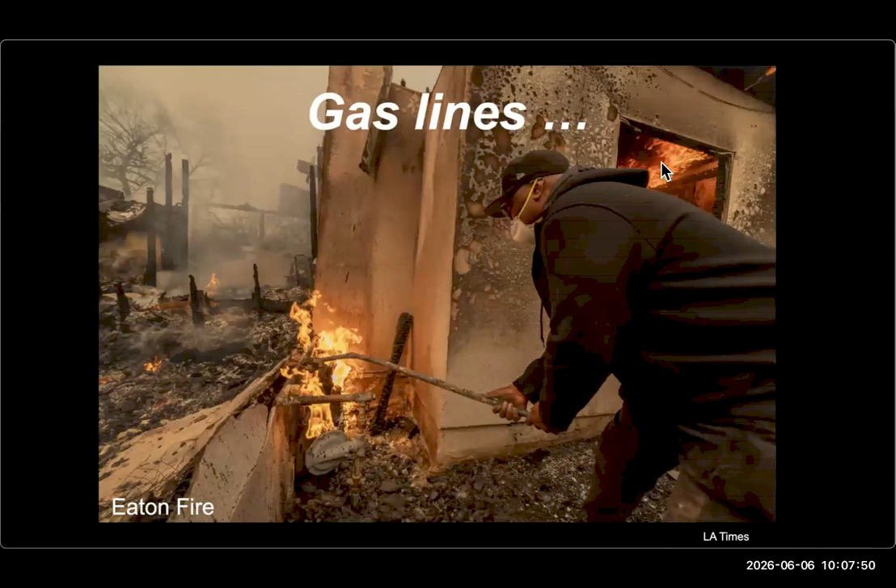Let's start with a definition. Resilience is the ability to recover from unexpected shocks. It doesn't take a rocket scientist to know that gas lines are not fire resilient. So how can we minimize future losses to our homes and loved ones as the climate crisis accelerates?

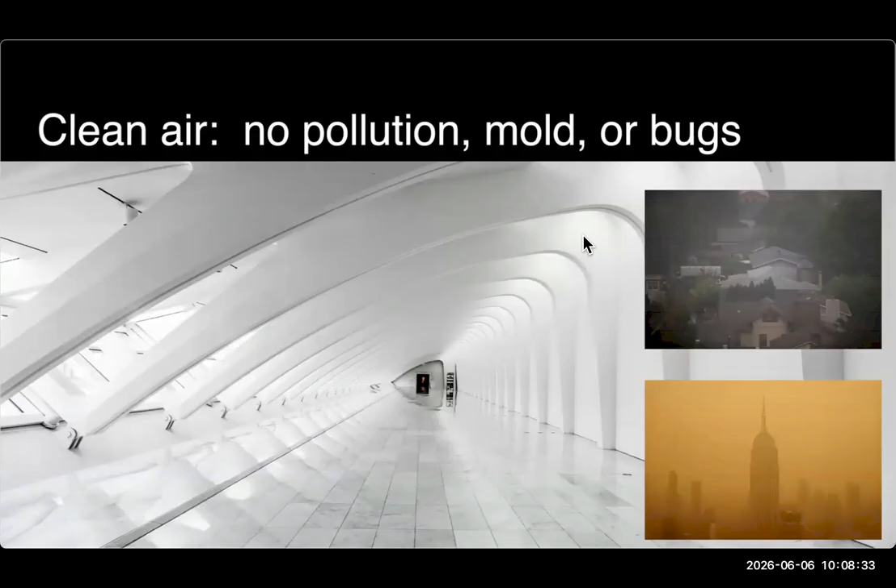Let's pause for a moment and imagine the homes we'd like to have. How could we describe them? They'd be cool in the heat, warm in the cold, no drafts, clean air, no pollution, no mold, no bugs, no dust in the house. They'd be quiet. They would use a paucity of energy, low energy bills. And with low energy bills comes a dwelling that's affordable to live in, and they would be fire resilient.

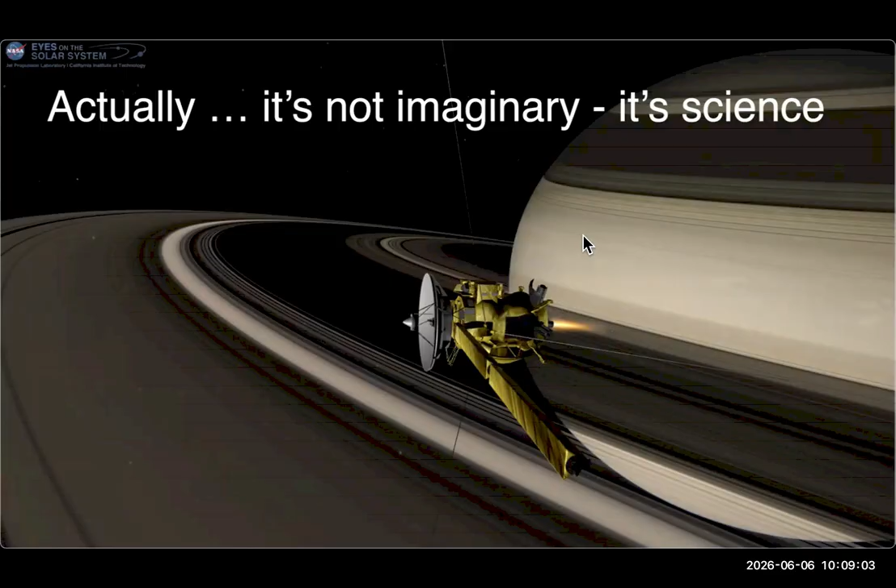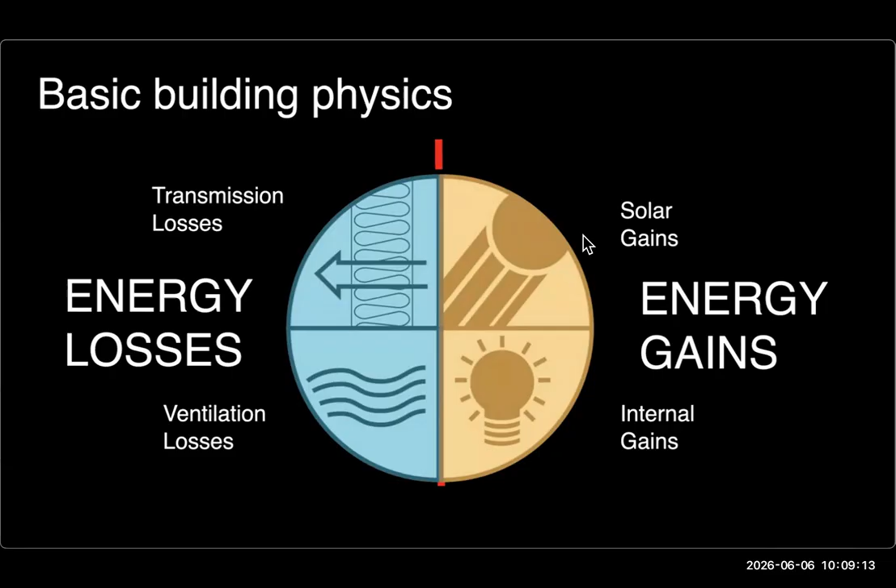That kind of home is not imaginary, it's science. And here's how we make it happen: we just apply basic building physics. We balance energy losses with energy gains. And it turns out that saving energy brings along many other benefits that we value even more.

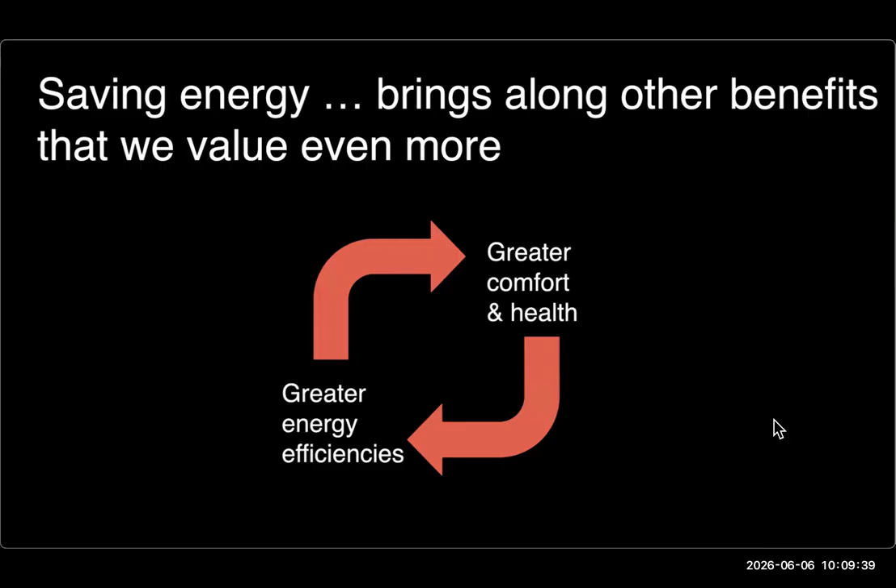Greater energy efficiency leads to greater comfort and health. And when you're striving for greater comfort and health, that in turn leads to even greater efficiencies. And saving energy is one way to bring this curve under control. This shows the rising levels of carbon dioxide in our atmosphere.

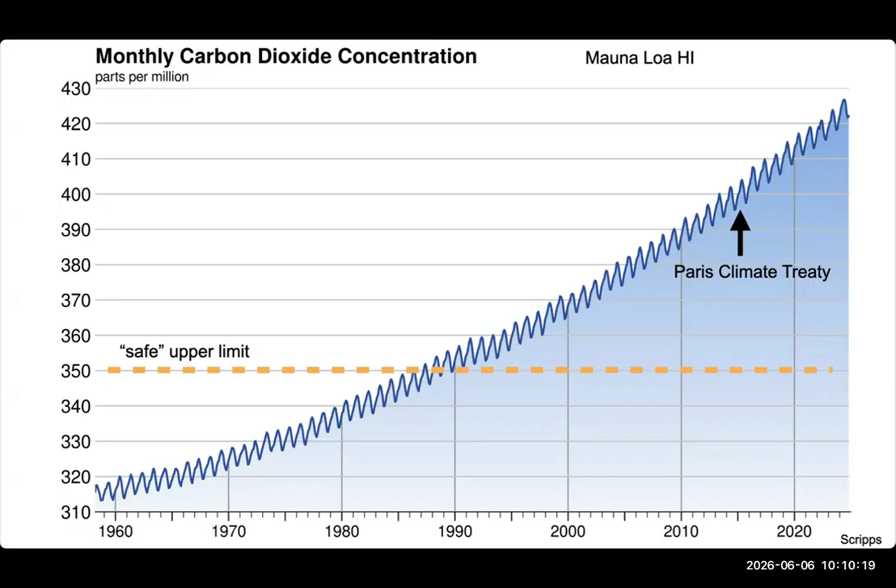Carbon dioxide is a greenhouse gas. There are other greenhouse gases also in our atmosphere, such as methane coming from natural gas. They're called greenhouse gases because they heat up the atmosphere just like a greenhouse heats up the air inside. But by that heating action, Earth's energy balance is thrown out of equilibrium. The world is warming up and it's happening faster.

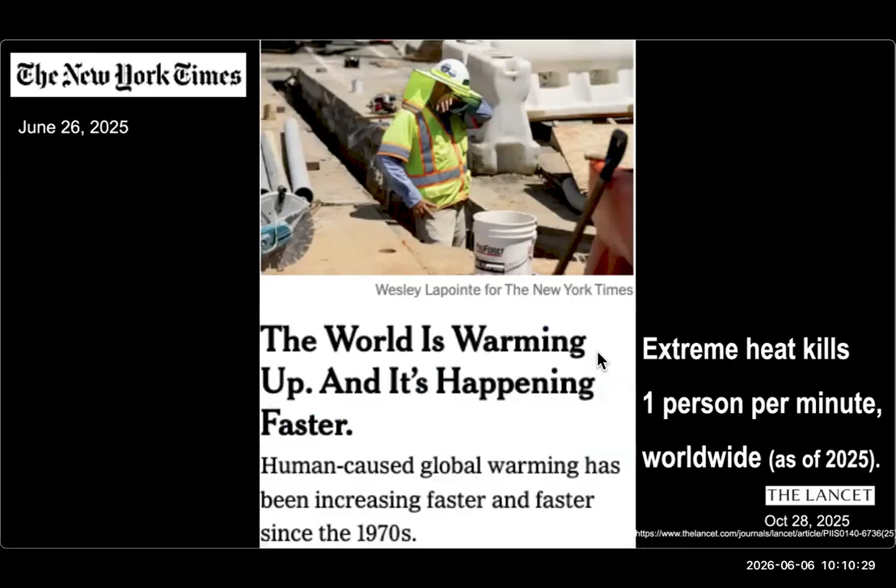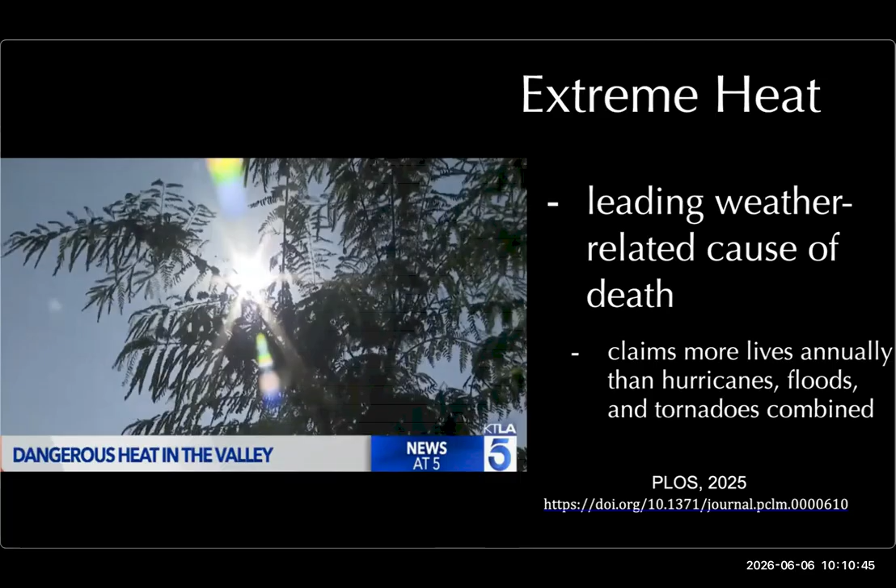Extreme heat kills one person per minute now worldwide. Extreme heat is the leading weather-related cause of death. It claims more lives annually than hurricanes, floods, and tornadoes combined.

So I want to talk about another kind of response, a way for us to help heal the earth even while staying busy with our own individual priorities.

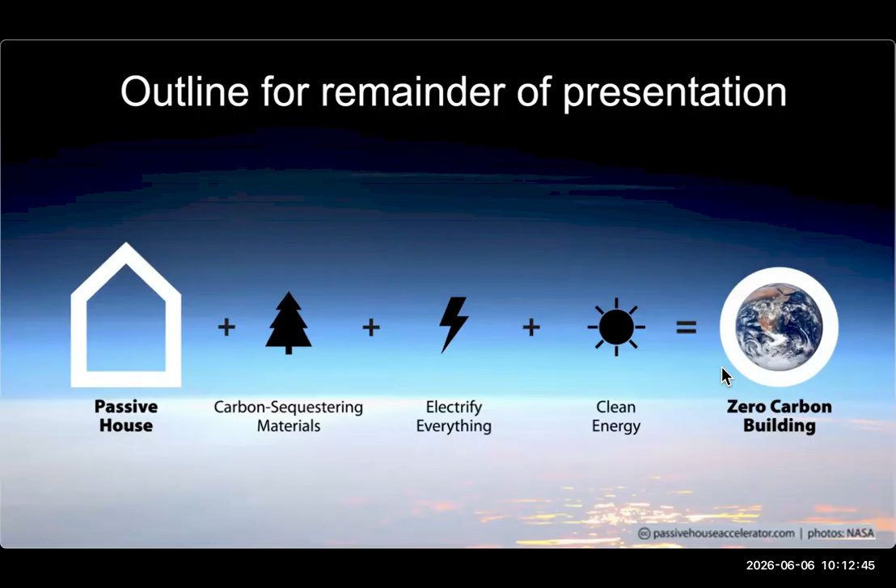After getting into a house, maybe a passive house, electrification is very important in existing homes or in a new home. And then sourcing that electricity with clean energy is important. And if you follow all these steps, you wind up with a truly zero carbon building.

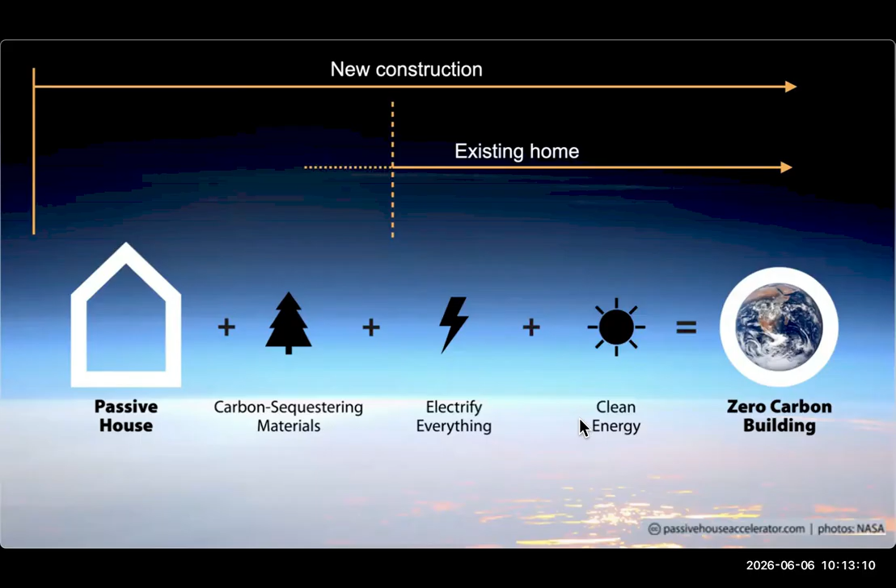Now, if you are building a new house, and there are several people in Altadena and out in the Palisades doing this right now, a passive house is a very good choice. But you don't have to be rebuilding. You can be living in an existing house, and everything I'm saying from this point onward would still apply.

With passive house, think of it as a home wrapped with a thermos-like enclosure, like a Yeti cooler. It keeps the heat in during winter, and keeps the heat out in the summer. Passive house brings with it heat resiliency and fire resiliency. So can you find the passive house here?

This is an infrared photograph, and the passive house stands out very starkly. You can see the oranges and reds and yellows - that's where heat is escaping from all these other dwellings. This unit, which was renovated to passive house standards, keeps the heat inside.

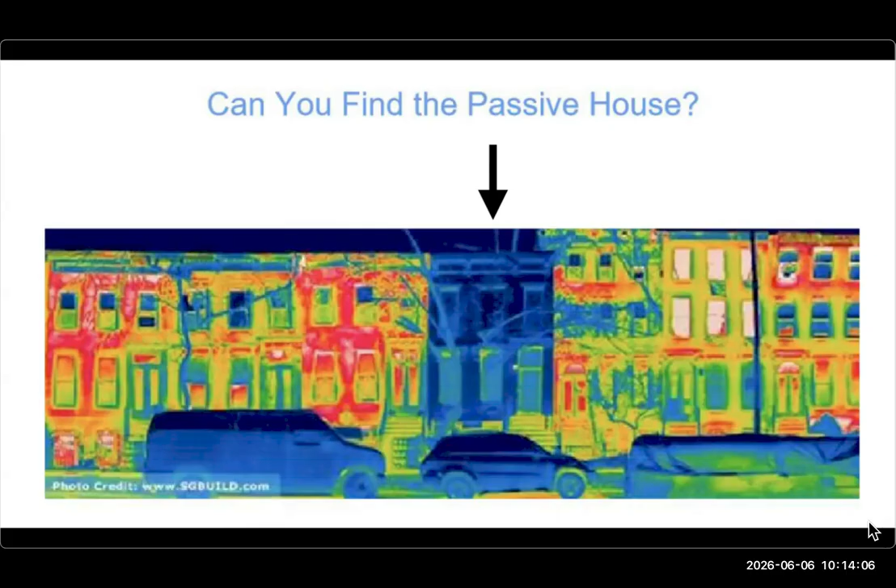Many of you may have this cookbook or heard of it, Salt, Fat, Acid, Heat. It's a way of mastering elements of good cooking with just these four components. How we use fundamental ingredients matters, and it's the same with Passive House.

Passive House has these ingredients, and you follow these sincerely and rigorously, and you will wind up with a passive house every time. So a passive house has a favorable form factor - that's like the geometry of the building, the shape. Passive house is thermal bridge free, a bit of a nerdy term, but it essentially also relates to the geometry of the building, the architecture, and how it's shaped.

Passive house has super insulation and high performance windows. That's very important. And really, the passive house's superpower is its air tightness - that's another feature of it. Passive houses also have smart ventilation. And here in Southern California especially, it's important to have summertime shading, because you don't want a lot of sun coming through those windows and overheating the house from within, since it's super insulated.

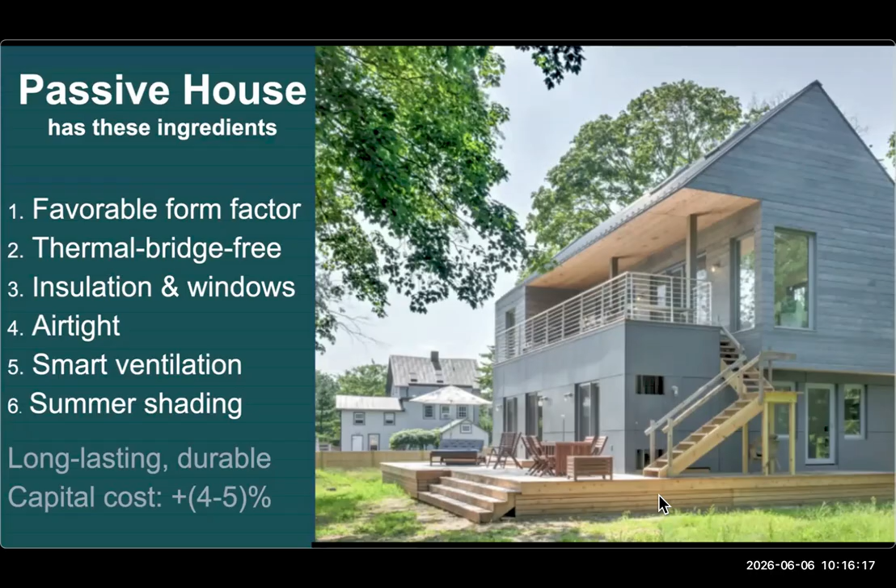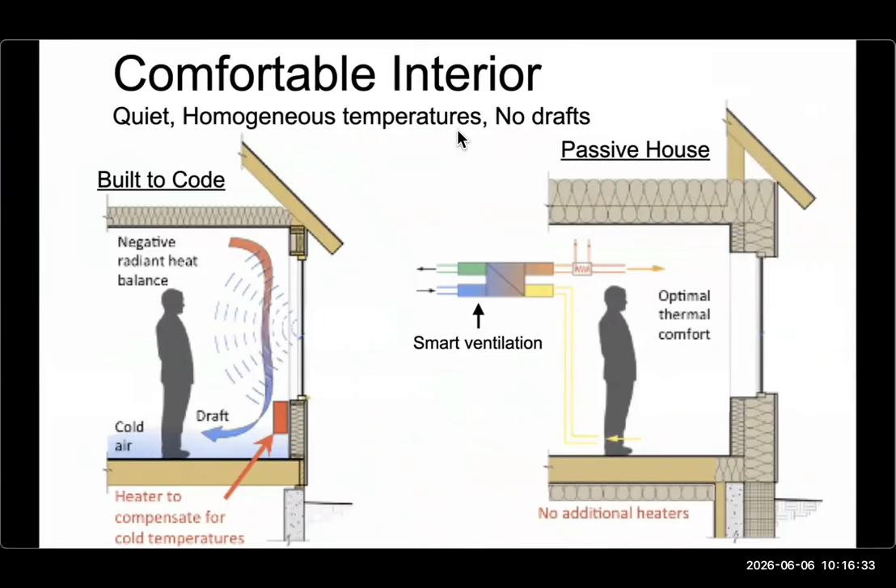So you do all that and you get a human-centered space that provides comfort, health, and stability. It's quiet, homogeneous temperatures, no drafts, and low power demand - and that brings down utility bills.

So here's a passive house in Sunnyvale, all electric. And this is a graph - I apologize, sometimes these aren't great to look at on a screen. But there are just three lines here to look at. This is energy use on the left-hand side, the vertical column. This top line represents the mean, or average, energy use of all the homes in the zip code that this home is located in.

The middle line is the predicted passive house performance, and the bottom line is the actual measured electricity use in this home. It's one quarter as much as the average use of all the other neighboring homes in its zip code. It really saves on energy.

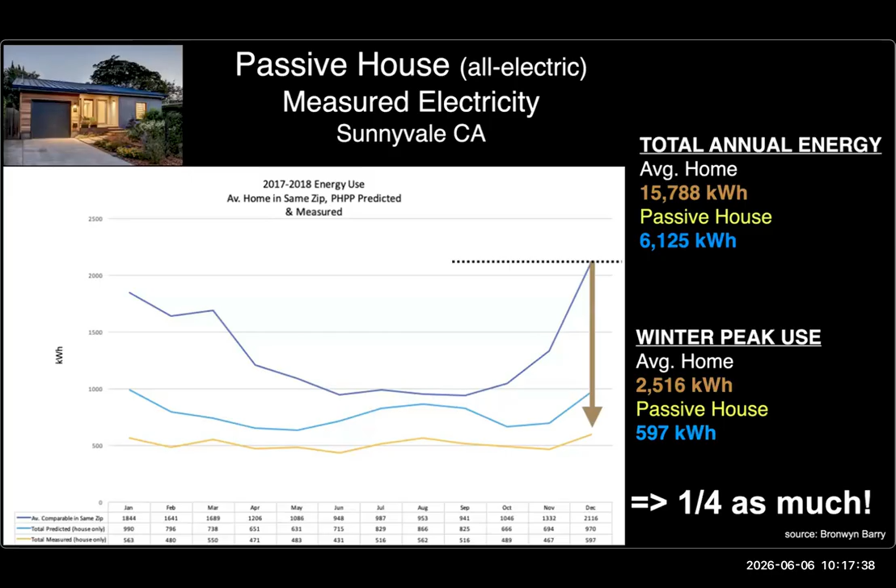However, most of the energy in California homes now comes from gas - from burning gas, the gas utilities that we have, the gas appliances.

But electrification can help future-proof your home, and Passive House makes that easy.

And what does home electrification look like? Of that two-thirds of gas that I mentioned used in most California homes, about half goes to heating water. More than a third goes to space heating, heating your rooms. And then there's gas used for cooking, and also for drying clothes.

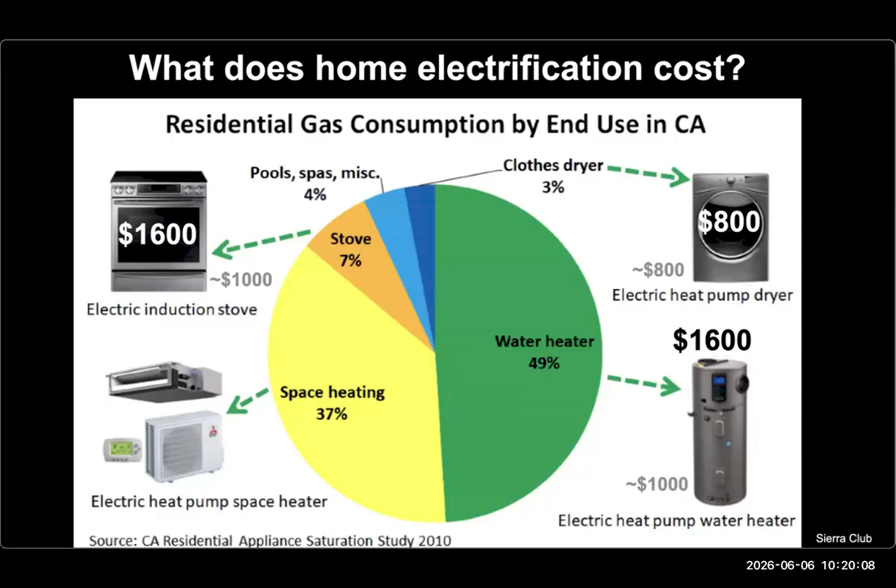So those are not insubstantial amounts, but you make up that difference within a few years on all the energy you save, because the heat pump and induction options are very energy efficient.

And for heating your home, conditioning it, heat pumps are a very good component because not only do they heat the home, the same unit also cools it. So it's like a twofer - this unit will both heat and cool your home. I don't recommend rushing out right now to replace your furnace and air conditioner, but when the time comes that those need to be switched out, it really makes good sense to put in one of these.

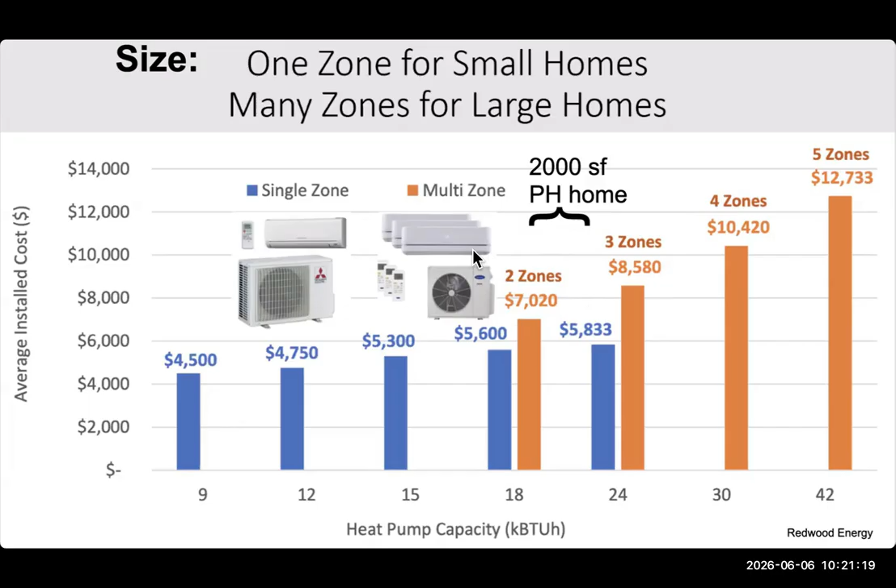If you have a small home, a single zone heat pump will probably work just fine. If you have a larger home, say a 2,000 square foot passive house home, then maybe a multi-zone heat pump - for this size of home, perhaps a two-zone heat pump. These costs are from a couple of years ago, so they may have gone up a little, but you're talking around $7,000, perhaps $8,000 for a two-zone heat pump installed.

And let's install rooftop solar if you can afford it. Place as many panels on your roof as you can. This is just - it's free. The sunlight is free, nobody is going to charge you for it. You have to pay up front for the panels, but then it's free, whatever energy you're getting from that, and it's clean energy.

A lot of people are reluctant to electrify because they say upgrading the electric panel is going to be so expensive, and it is - it's a substantial upgrade. But you can do it even if you have just a 100 amp panel. You can still electrify your home.

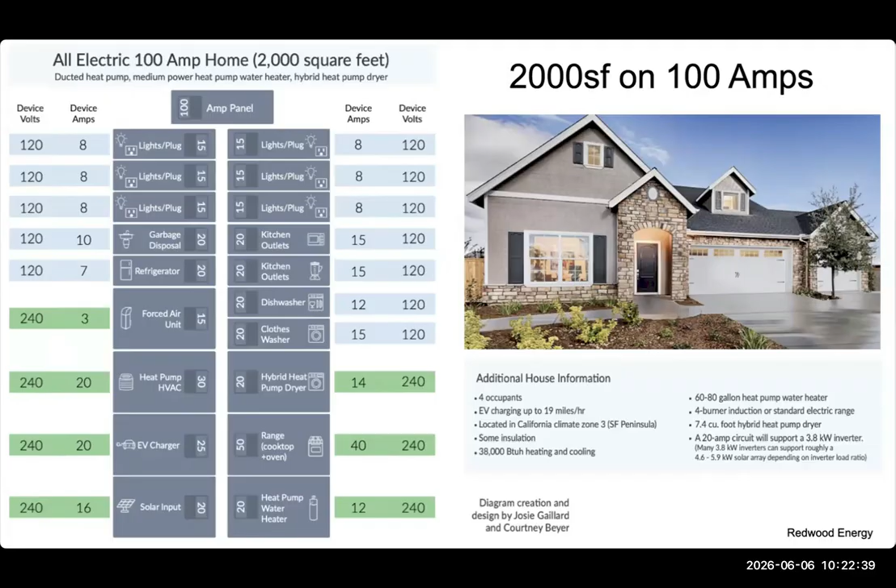And this is an example - it's a very busy slide, I'm not going to go through all of these points here. But for this 2,000 square foot home, which has a 100 amp panel, this shows how to map out a totally electrified house on this size of panel, including a port for charging an electric vehicle. So it can be done with just a little bit of thought in advance to electrify a house with a 100 amp panel.

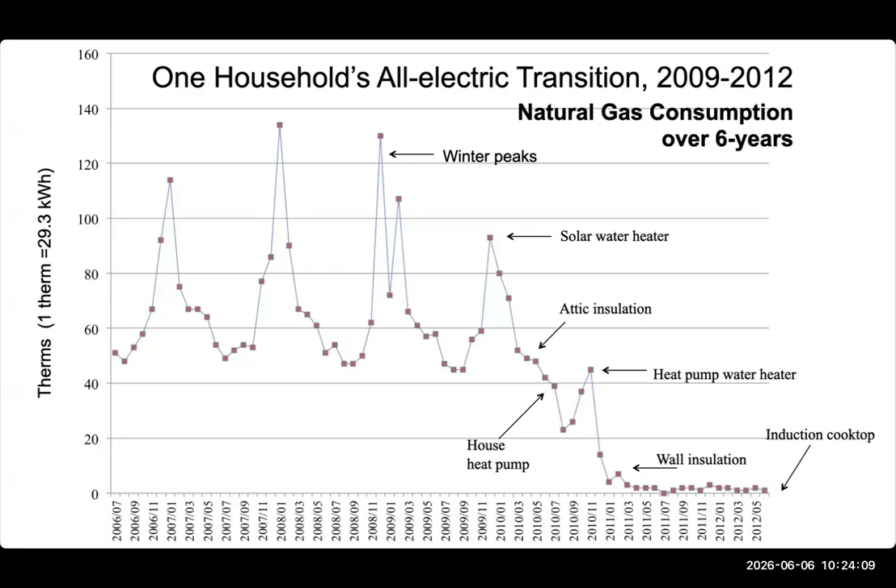And then wall insulation was installed, and then an induction cooktop was installed, and that eliminates all the gas use in the house. It just brought it right down to zero. So this is an example of how to electrify your house.

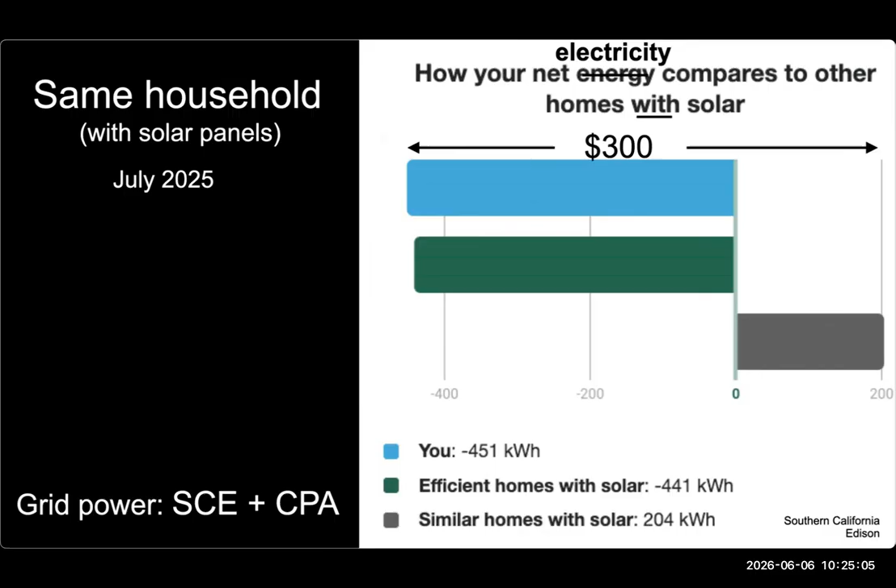And the same household, if we fast forward to July 2025, this shows the savings with solar panels on the roof. There's a comparison here, kindly provided by Southern California Edison, of energy use just between homes with solar on the roof. This home saves around $300 a month compared to other houses with solar that haven't implemented those energy conservation measures. That's $300 a month, which is pretty significant. So those upgrades do make a difference.

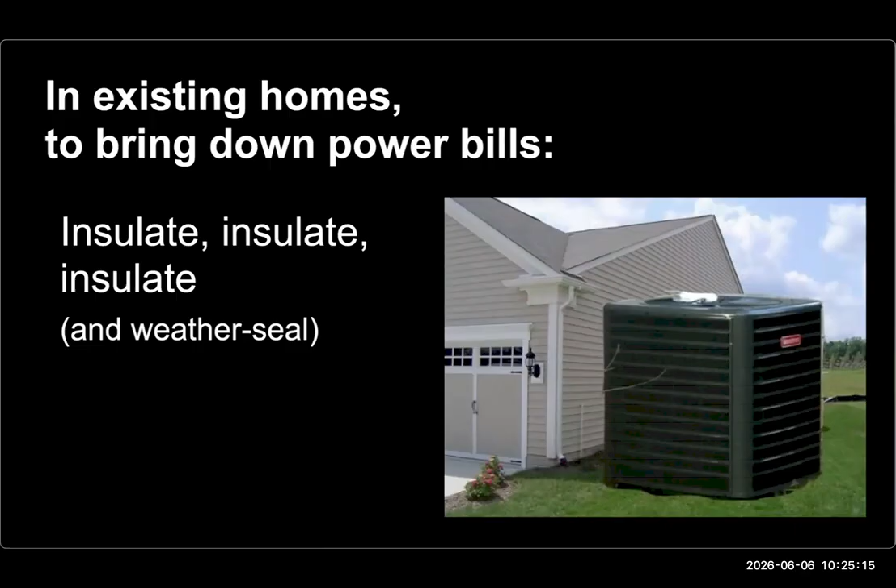So in existing homes, if you want to bring down power bills: insulate, insulate, insulate, and weather seal any of those cracks under the doors and windows. The passive house advantage is that you'll get a very large reduction in your air conditioning equipment sizing, both heating and cooling.

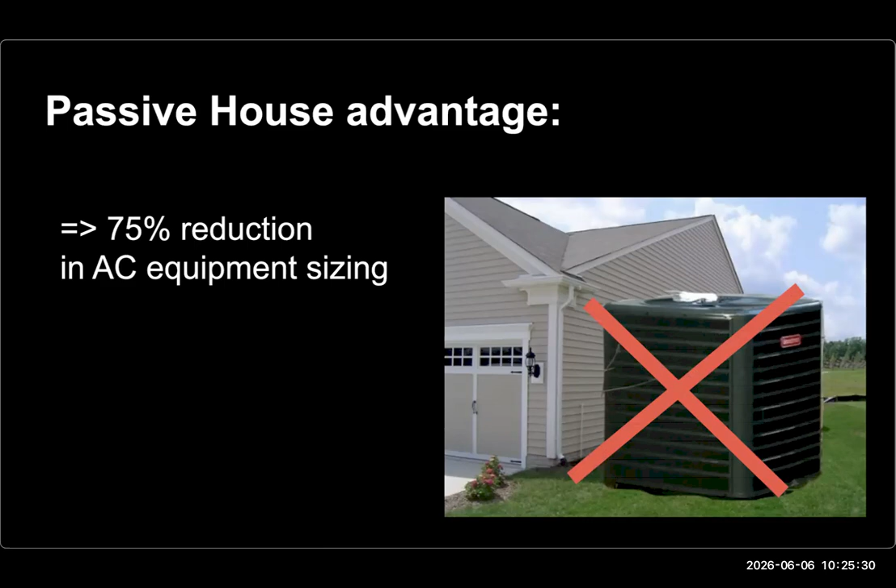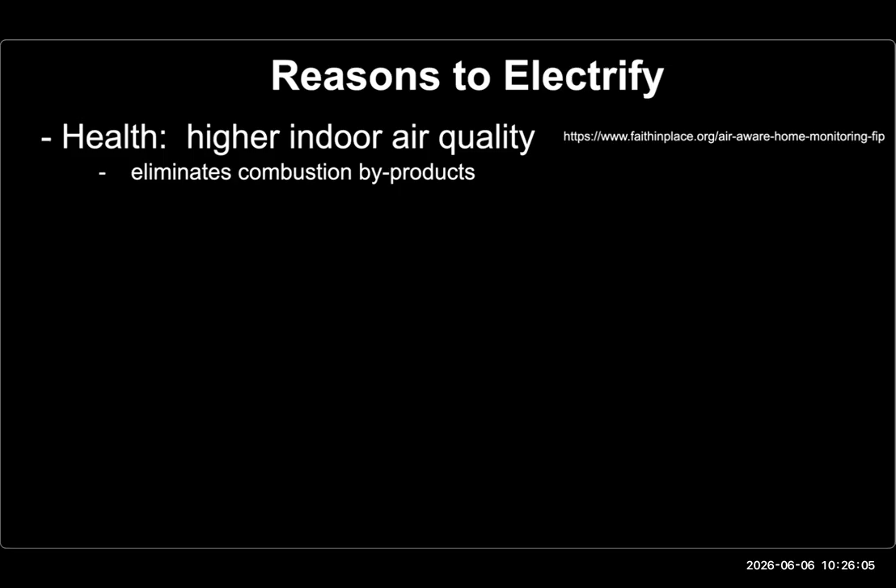So let me describe what I think are the reasons to electrify your home. One is for your health—much higher indoor air quality, both because you're keeping out dust and pollen from the outside, but also because an electrified house eliminates combustion byproducts occurring inside, from cooking in the kitchen and from heating water downstairs. There's also a safety issue: not having gas and combustion in the house reduces fire risk. And for the climate, eliminating combustion in your house eliminates heat trapping pollution.

And then there's the cost side. Your utility bills will go way down, especially if you can constrain demand and install rooftop solar, which offsets your bills considerably. And on the other side, there's the volatility of gas rates—they're almost guaranteed to rise, and maybe rapidly, in the coming years.

Insurance will probably be, if it hasn't already emerged, a tiered rate system regarding both houses built to a high fire standard as well as electrified homes. And if you're building new—if you were unfortunate enough to lose a house, or you're just starting a new build—going all electric will actually save you money up front. Around $30,000 can be saved by eliminating the installation of gas line infrastructure and the associated labor.

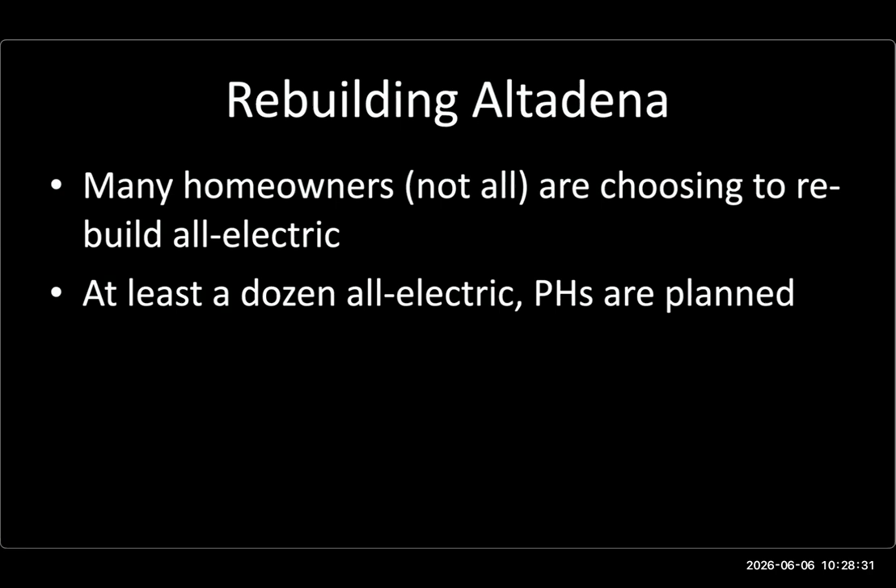Now I want to focus on a particular house in the rebuild area in Altadena. So many homeowners, not all, are indeed choosing to rebuild all electric. And moreover, at least a dozen all electric passive house homes are planned at this time in Altadena.

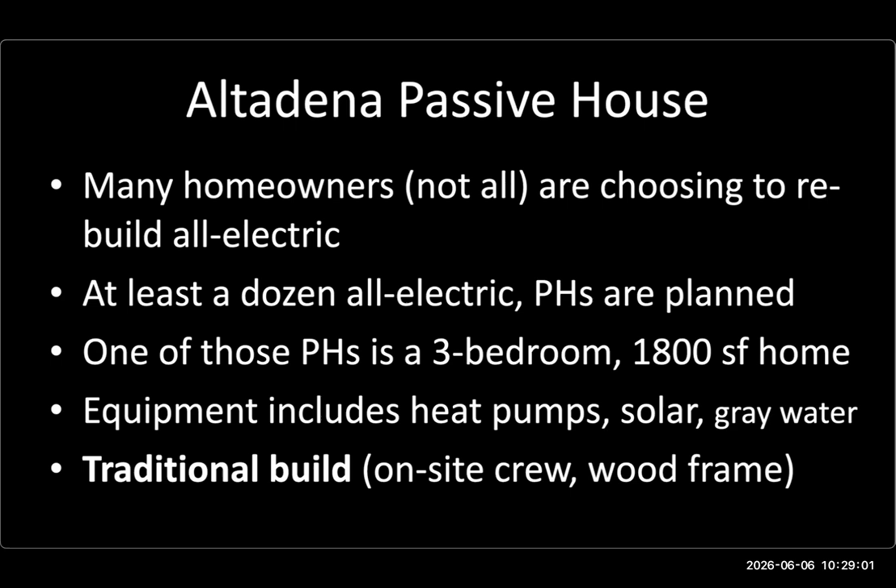There's one of those passive houses I'll look at in a little detail here. It's a three-bedroom, 1,800 square foot home. Its equipment includes heat pumps, rooftop solar, and a gray water system. It will be a traditional build, meaning an on-site crew with a wood frame—it'll be a wood framed house, but with many fire resilient features.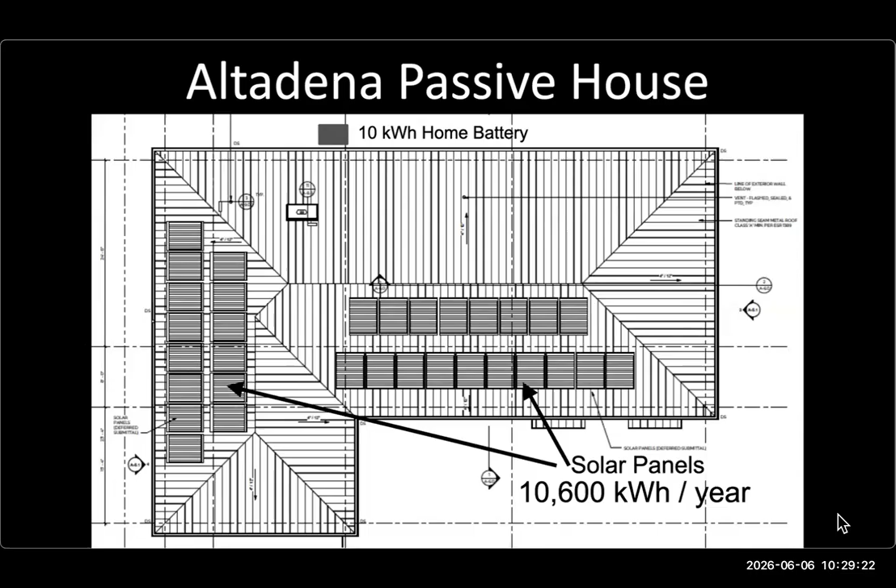This is what the house looks like from above. I'm pointing out these solar panels on the roof that will be installed, along with a home battery on the back—I point these out because I'm going to refer to this number in a moment. This house is under construction now, but is being built to the passive house standard. It will be all electric as I've described.

Heating is almost non-existent in the house because it's barely expected to be used, and remember this is electric heating, so very small. Cooling takes more energy - this is Southern California, but it's still quite small. The largest single component is just illumination and devices in the house, so that's what consumes most of the energy.

If you take these numbers in the middle, this is the energy use - you just add these up, how much energy is used for each of these columns, and it's less than this number up here, the amount coming from the rooftop solar. So that means this is a net zero energy home, meaning low to zero energy costs for the whole year.

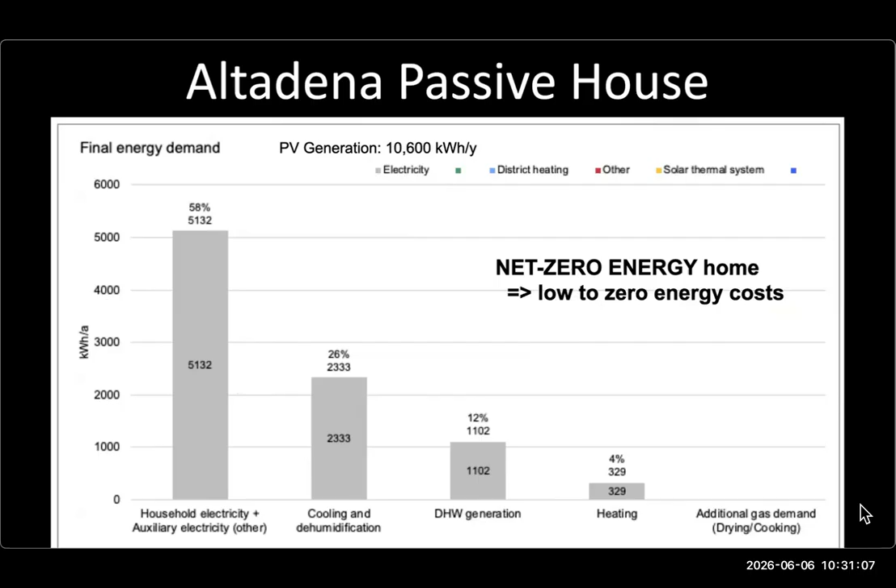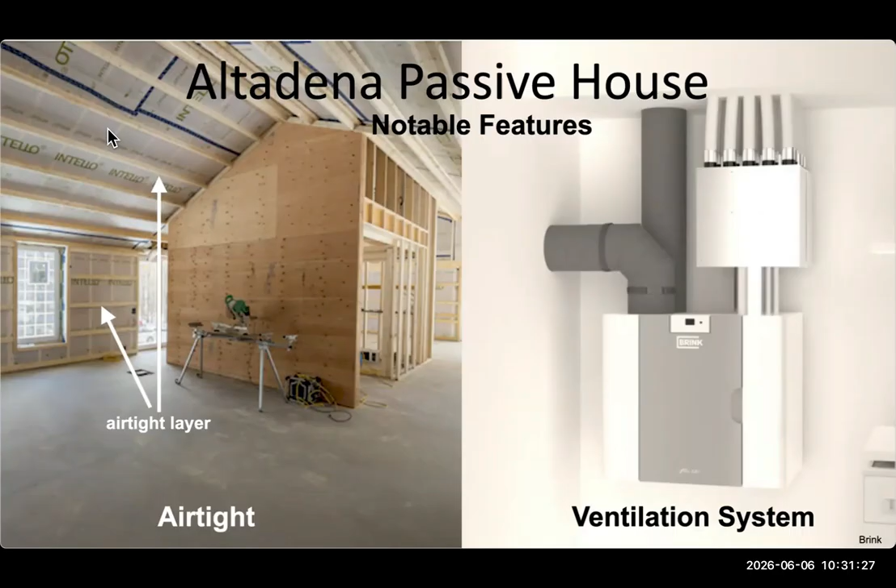Here are some other notable features of this house. It will be airtight, as I mentioned, that's part and parcel of a passive house. This isn't an image of the house I'm describing, but it's representative of another house - this is the airtight layer right here. The house will come with a ventilation system.

The Blue Ribbon Commission on Climate Action and Fire Safe Recovery highly recommends passive house as a fire resilient building technique - they call it out specifically, saying these homes are great to build if you're concerned about fire safety. There are many fire resilient techniques you can apply to any building, but what really stands out with a passive house is its air tightness, and that contributes to its fire resiliency.

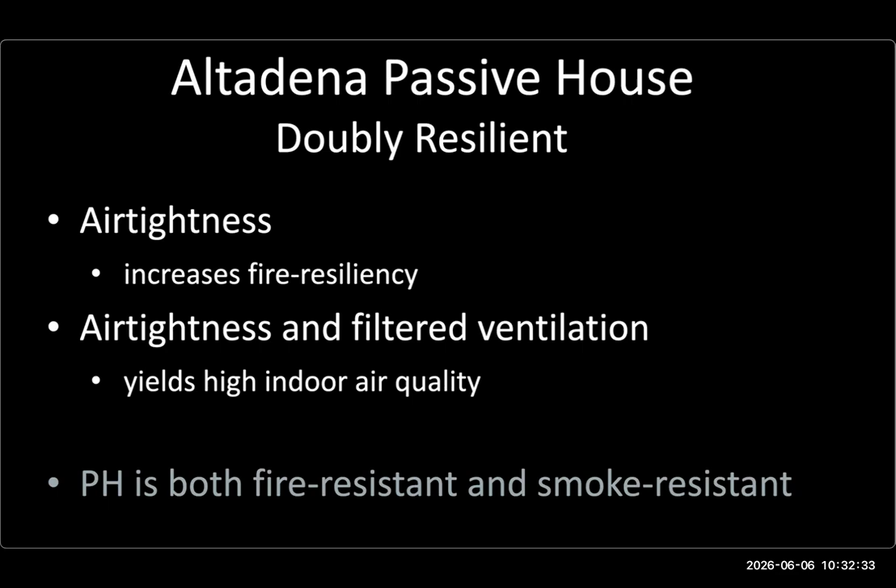By combining air tightness with a continuous supply of filtered fresh air, this house will offer a very healthy living space - it'll be both fire resistant and smoke resistant. I want to make that point because it's pretty important based on the experience we've had over the last few years. This example is from Australia when they had really large fires there a few years ago.

Here's another graph, the last one I promise. On the vertical axis is the particulate count in the air - how dirty the air is, the ash, the smoke. 400 is an extremely high number, and that was the outdoor measurement at this site in Australia. This was a passive house where a gentleman took these measurements, with a single standard passive house filter already in place - that roughly halved the outdoor level of smoke and ash.

Then you augment the one filter with a second filter - you just slip it in, there's a place in the machine for it. You add the second filter, and look at this - look at how it drives down the level of particulates, keeping the air completely healthy. This dashed line is where the World Health Organization recommends as a safe count. So, super performance from the passive house.

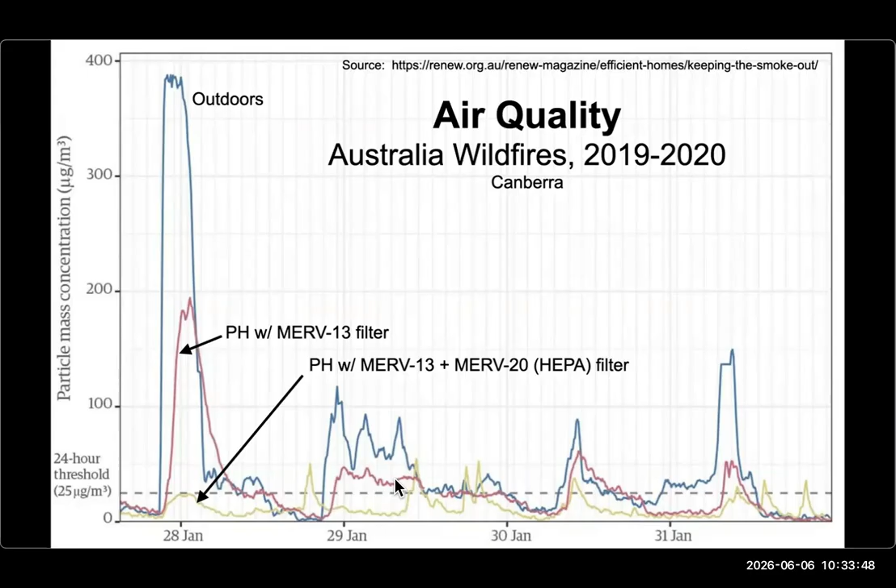Just quickly, to describe other fire resilient features you can have on any house, including a passive house: this may look like wood cladding on the side here, but it's not - it's fire safe, something called HardiePlank. It's a combination of cement and sawdust, but it's fireproof, and they can design it to look like it has a wood grain.

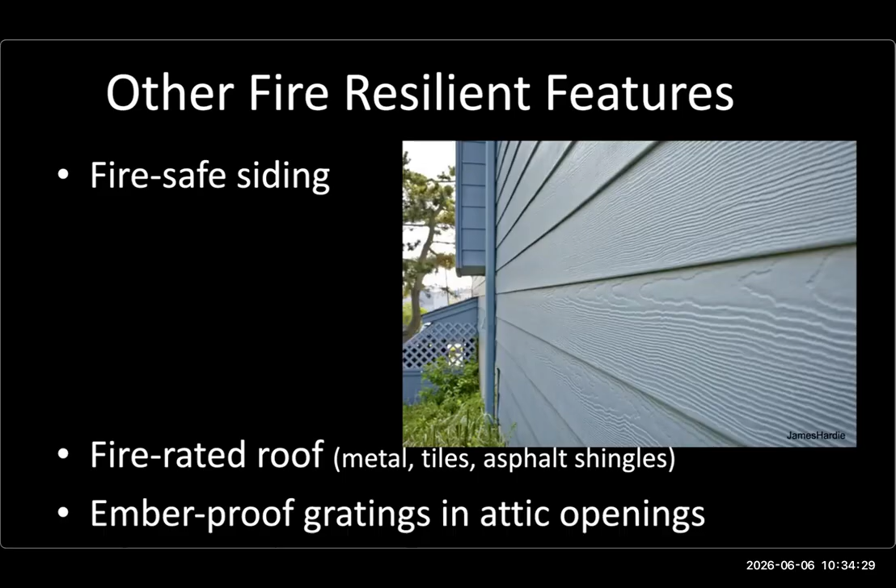Or you can put stucco - stucco is also fire resilient. You want to have a fire rated roof, and you also want to install ember proof gratings in attic openings, just to keep that upper part of your house safe.

Now really quickly, I want to describe an alternate way that's being used to build houses in Altadena. Several of the homes I've discussed are going up using prefabricated wall and roof assemblies - some of those will be passive house. The advantage to prefabrication is labor savings; the on-site crew time is significantly reduced, from roughly 4, 5, 6 months to about a week.

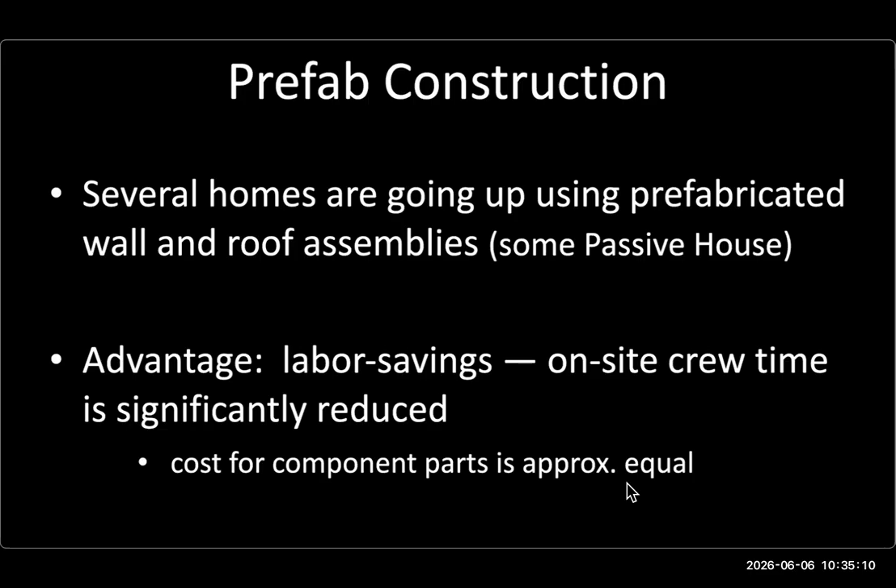The cost for component parts is around the same, so you're not saving money on parts, but you are saving it on labor. The disadvantage to prefabrication is that the foundation and piping must be laid in advance with a different crew, leaving only a tiny margin for error. But a lot of those issues have been worked out, and there are at least two prefab companies operating in Altadena: Collective Carpentry and B Public.

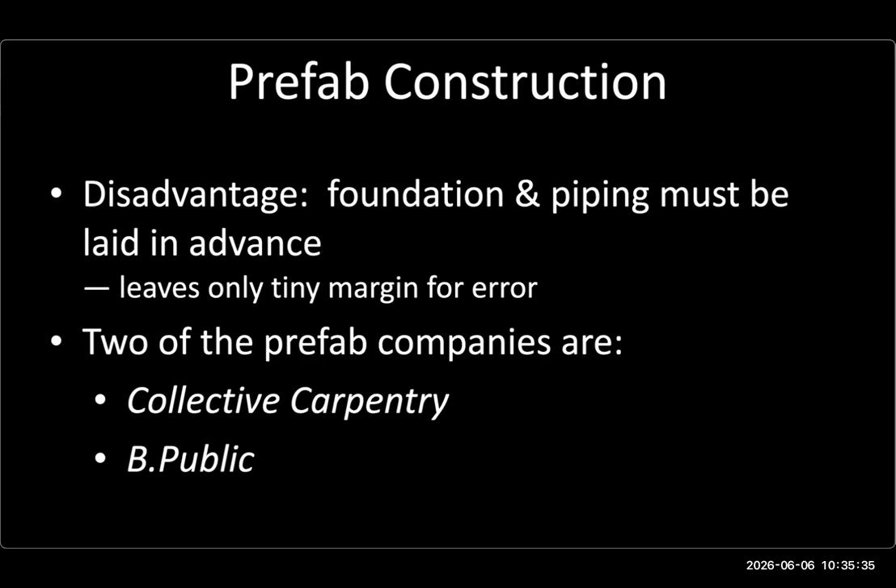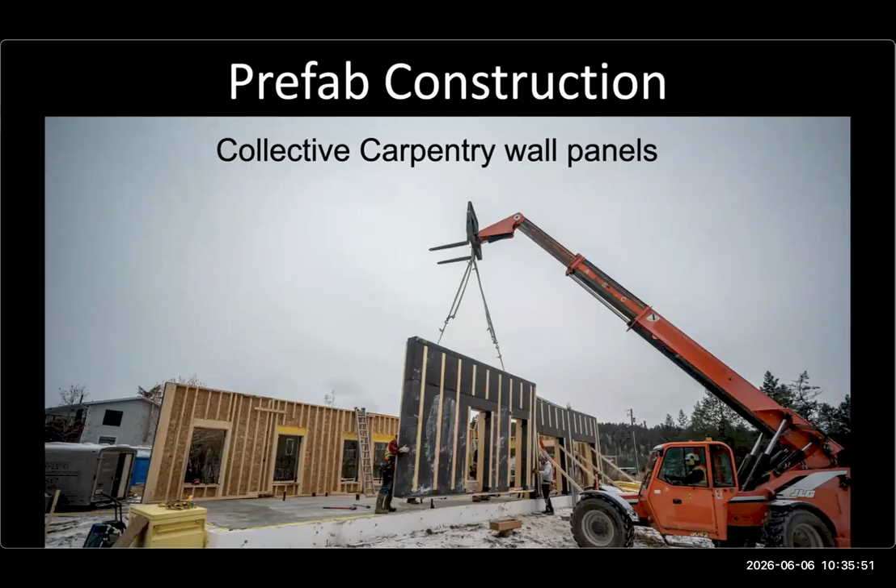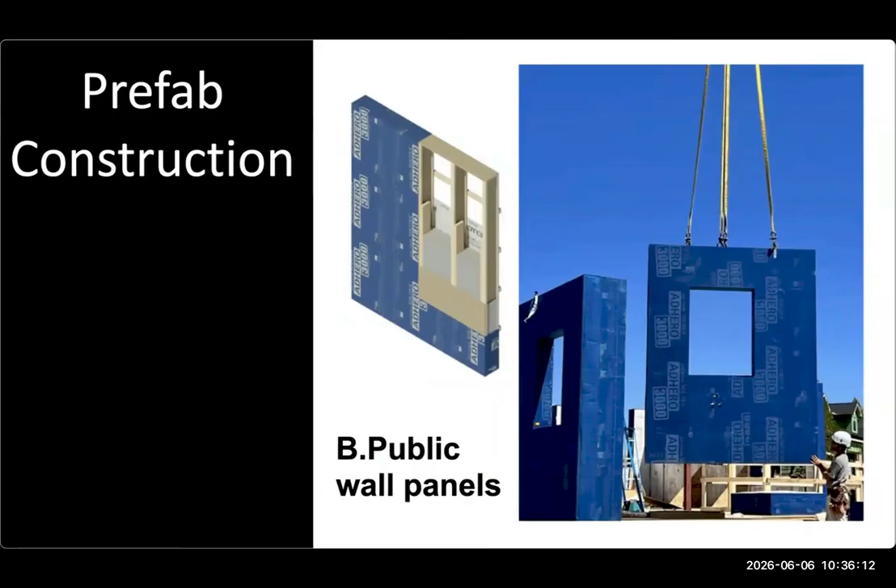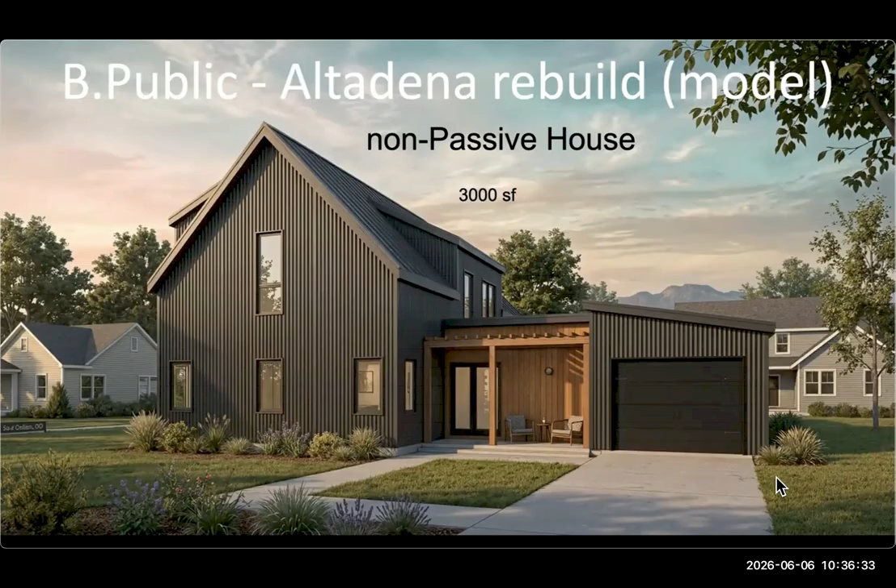There are incentives to go all electric or to build passive house. If you're in Edison territory, as most of us are in Altadena, there's the Rise Homes program. And out in the Palisades, for example, under the auspices of LADWP, they have a similar kind of program.

So just to recap what I've been saying: it's important to electrify everything in your house. That's a really important goal, but equally important is reducing demand. Drive down the amount of electricity you're using. And I talked about insulating the house, and ways to do that - a passive house can help with that. Think of leveraging passive house as a tool for exercising resilience. And you combine all that with clean energy, and it yields a healthy, comfortable home, which significantly contributes to climate action.

And that's all I have to say for this morning. Now's time for questions if there are any.